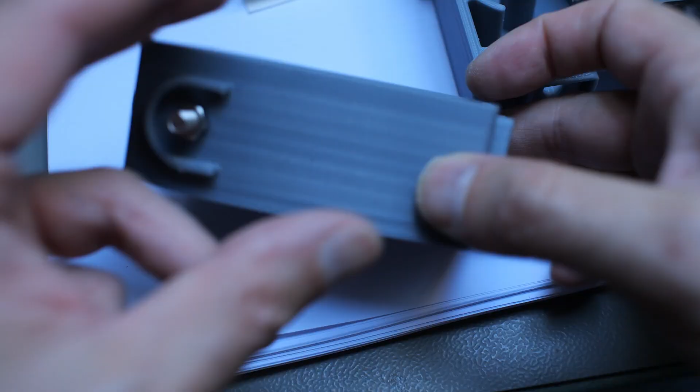Another change I made is for that ridge here on the outside. So as you can see, you can now also put an M5 bolt in, not just a 4mm banana plug.

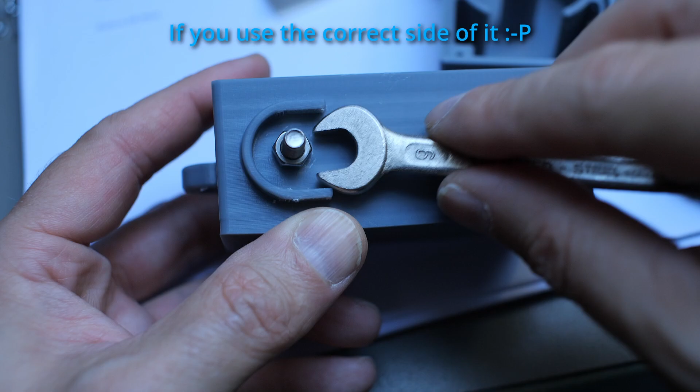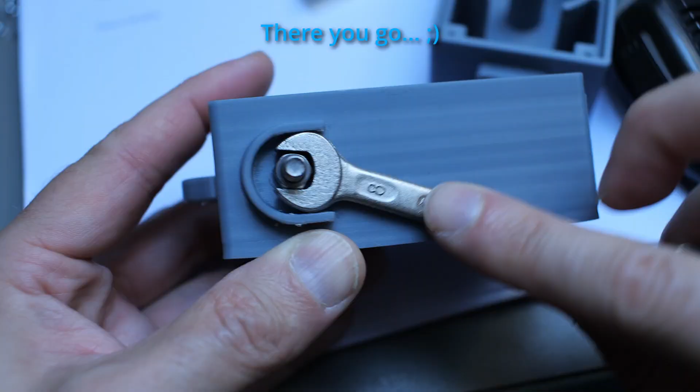And it's designed so that my spanner fits here. So if your spanners are a different size, it might still be a bit problematic. I'm trying to show this through the viewfinder of the camera, as you can see - an 8mm size spanner for the

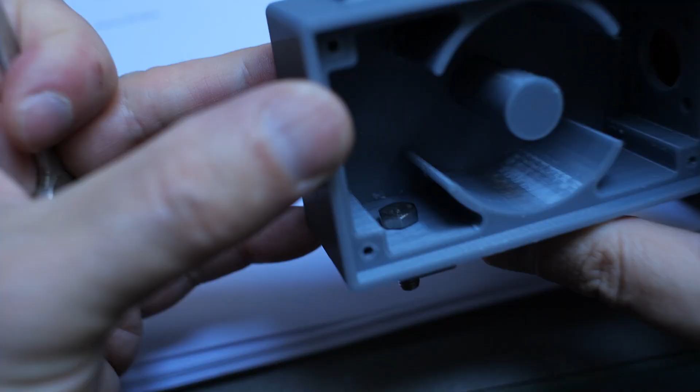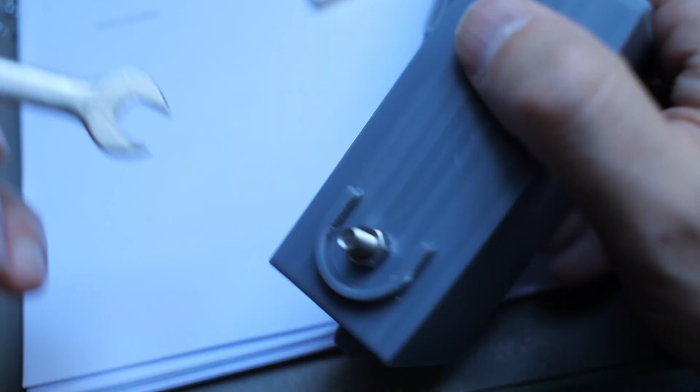M5 screw and bolt fits in here, and on the inside you should also barely have enough space to put a spanner. You might have a bit of problem with the orientation, so you have to put the hex head in an orientation where you can hold it, and then put a socket on top and tighten it up, or wiggle a bit and tighten it. The idea of this ridge was basically just some water protection, so that if it hangs vertically, the water doesn't run in.

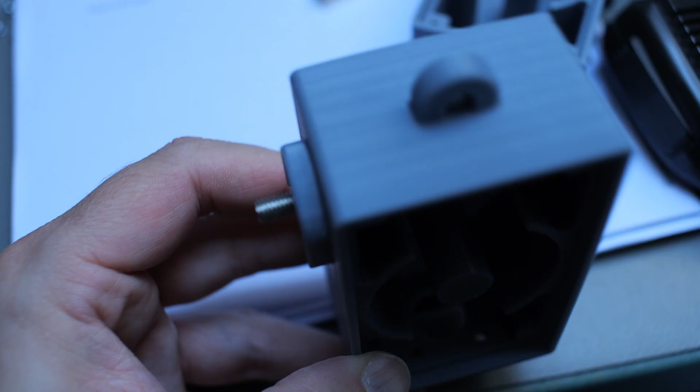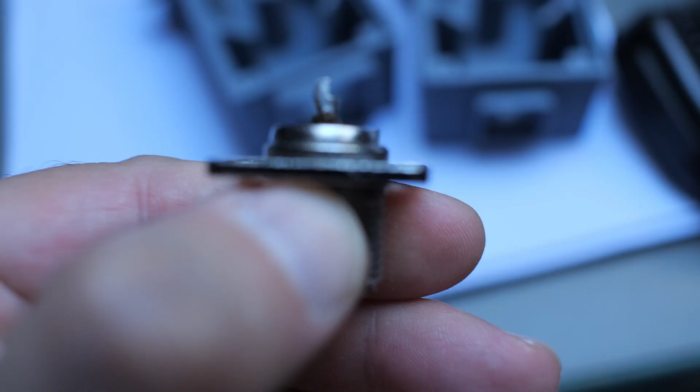Okay, another set of changes. I found another SO239 connector that has this ridge here, and the first one I tried didn't have that extra fat ridge on the outside, so I adjusted the design so we also have that ridge here now. It still needs a bit of tweaking, maybe a few tenths of a millimeter bigger, so that you can also mount these kinds of connectors.

And I made a variant for a BNC flange connector as well. Let me have a look, like this. It's basically exactly the same design, just downscaled, so you can fit one of these in. And of course, in theory it's very easy to make one for a BNC connector, which just has a screw terminal - you just change that square thing to a round thing, lose the 4 holes, and adjust the diameter. It's all, I must say, nicely organized now in Fusion 360.

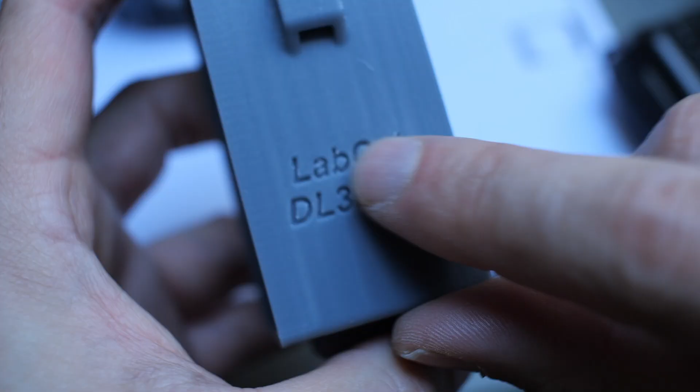I will show you in a second. So it's pretty easy for anybody to just import the design and adjust it to their needs. Then you can also change the label on the outside, or maybe when you print the lid, add some text to say that this is a 1 to 49 transformer, or whatever else you want to build, 1 to 4, 1 to 9.

Okay, and here we are in Fusion 360. Let me show you the design files. I went a bit the extra mile and cleaned it up a bit, but I'm not a professional user. The tool is very sophisticated, you can do so many things with it, and probably there are better ways to do things than I do, but I'll get along.

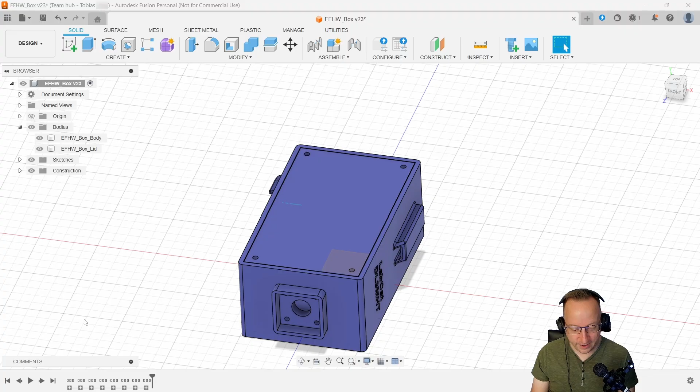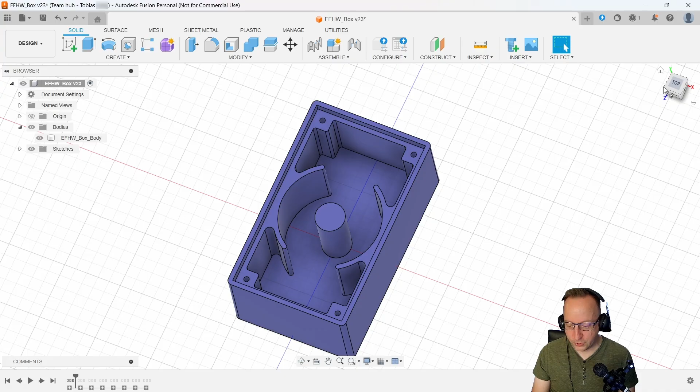So as you can see, I've grouped the different features of the box into different groups at the bottom to make it easier to edit. Let me just scroll through the timeline. So the first group is the body, with the basic dimensions of the box that you can edit.

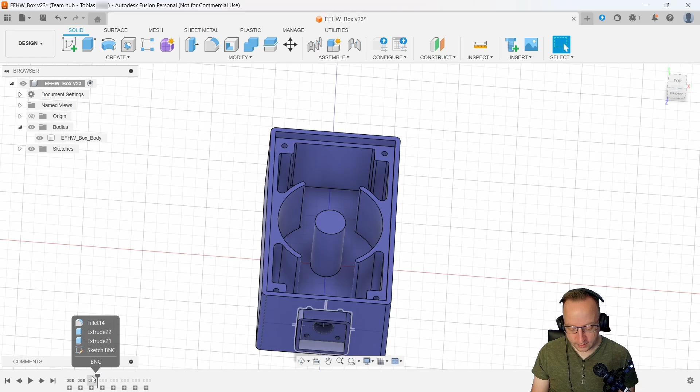The next feature is the SO239 connector at the bottom, and I've hidden or suppressed that feature at the moment because right afterwards we have the BNC connector, and that one is unhidden. So if you want to switch between these two, suppress one and unsuppress the other. Maybe there are better ways to do this - not sure if better ways exist for the non-commercial version. If you know, let me know in the comments.

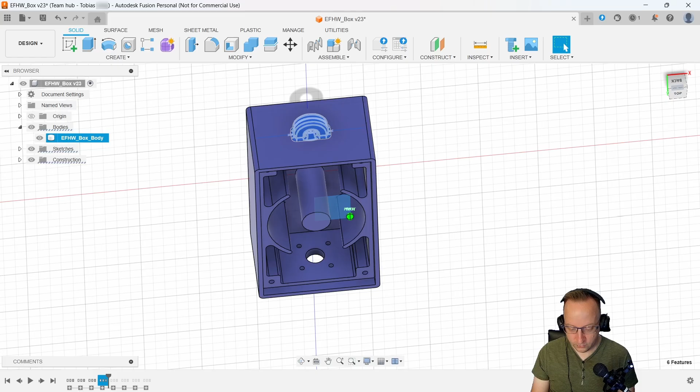Next feature is the hook at the top. If you don't like that, just suppress it, delete it, or edit it to your liking. The next feature is this output thing with my round ridge, shroud, whatever you will call it. I'm not sure if that is a good idea, but it felt odd to just let the bolt come out directly and let the water soak in. So I thought maybe that little thing helps a bit.

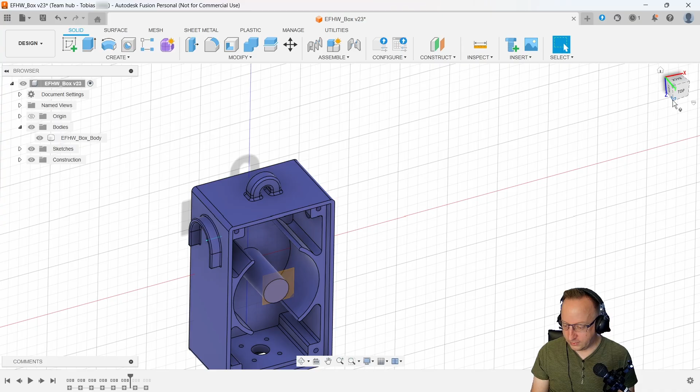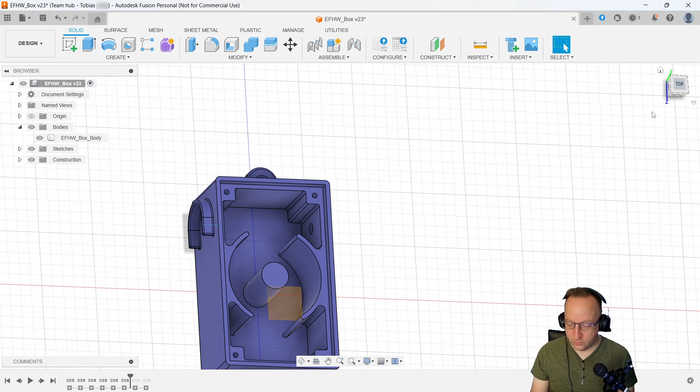Next feature is the moisture exhaust, or I don't even know - there's probably a proper name for these things. So if you don't like that and say my box should be closed, just suppress it, or maybe change it and give it another output on the other side. You could mirror the feature to the right side, and then use it for a dipole or God knows what.

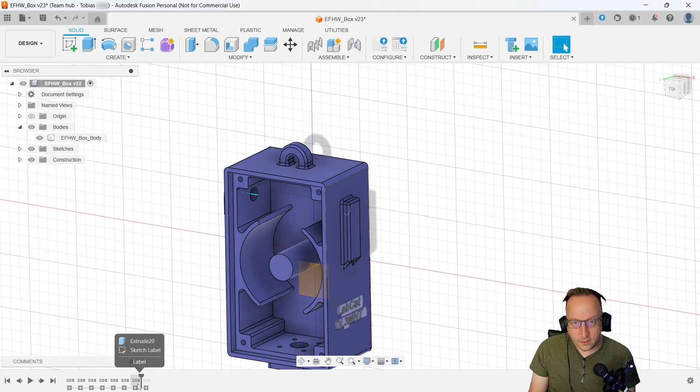Possibilities are endless. Next feature is the text. If you don't like my call sign and name here, you can suppress it or put your own call sign and name in, or say it's 1 to 49, or 1 to 4 balun, whatever you want to put into your box. And the last feature is obviously the lid, and as you can see, I put the least amount of effort so far into that.

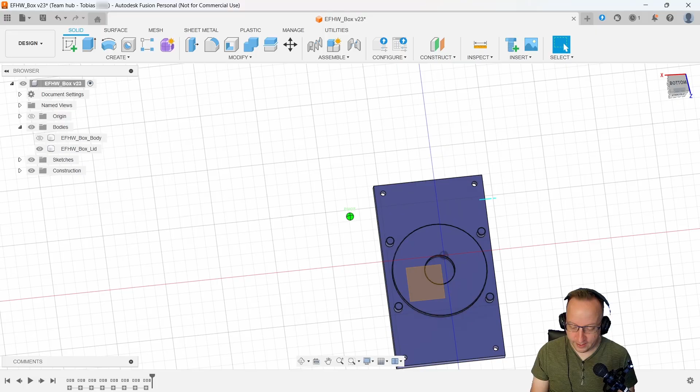And of course, one can argue and say, hey, if you really want to make it watertight, make the whole box 5 millimeters bigger on each side and put a ridge in where you can put a silicone seal or something. But this was my attempt, trying to keep it fairly simple.

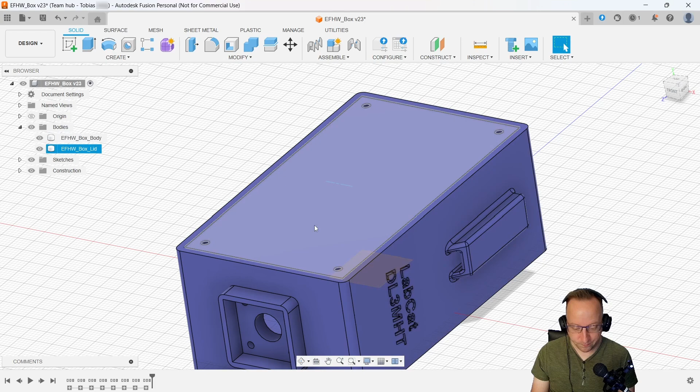I'm interested to learn if anybody will iterate based on this design. Okay, so I think we are homing in here on the final design. I've printed this far too often now, and I hope it will be useful for you. Everything is on Thingiverse, as I said, including the design files that you can import and edit.